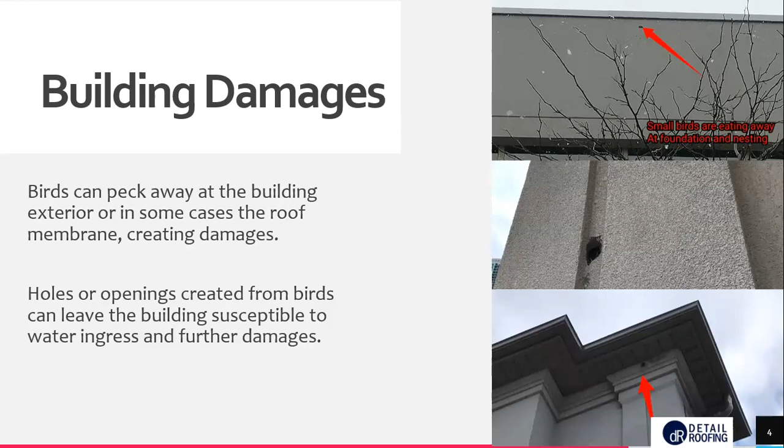Again, if there are any openings, whether it's something that they have created or something that exists already, either from other animals or from wind damages, any sort of opening like that, birds can create nests just about anywhere. So it is something that we see often if there are any openings in the building exterior or throughout the building, and also in areas like gutters or overflow scupper drains. In areas where they are doing it in the gutters or the scupper drains, this can be a big issue as it can potentially block the drainage, causing water to back up and potentially create flooding situations. We also see them sometimes around vents, whether it's on sloped or flat roof surfaces, which can potentially disrupt the ventilation. And depending on where they're built, if it is somewhere that's near a heat source, then it can create a fire hazard.

A huge issue with birds when they are especially congregating in large groups are the droppings that they leave behind. So as you can see here, not only are the excessive droppings unsightly, but there's also a number of other issues, one of which is the fact that these droppings are highly acidic. So if there is an excessive buildup, it does have the possibility of causing deterioration if left over time. So it can cause deterioration to shingles, to metal, to concrete surfaces. So getting that removed as soon as possible and preventing birds from creating excessive droppings like this should be top of mind.

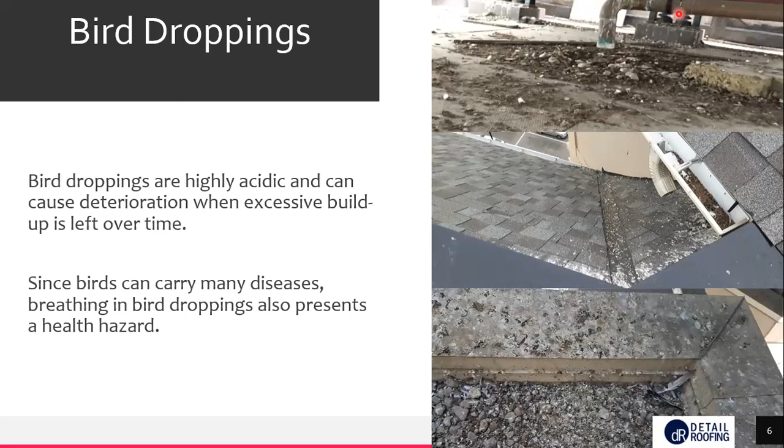In any cases where there are existing bird issues or where there might be any bird issues occurring, we definitely recommend keeping an eye out, whether it's during overall roof inspections or just regular walkthroughs that you're doing of the building, to try and identify any areas where there's damages to the membrane or to the building exterior, like some of the photos we saw that might be caused from birds pecking away.

Any damages that are incurred from bird issues, we recommend getting repaired as soon as possible, just to try and prevent wider spread of damages and potential interior water ingress issues. In cases like, again, some of the photos we just saw where there is excessive buildup on shingles or metal flashings, if it has gotten to the point where deterioration is occurring, then replacing those areas may be recommended. If it isn't as excessive and the deterioration hasn't occurred just yet, it could be a situation where cleaning and removing those surfaces may suffice.

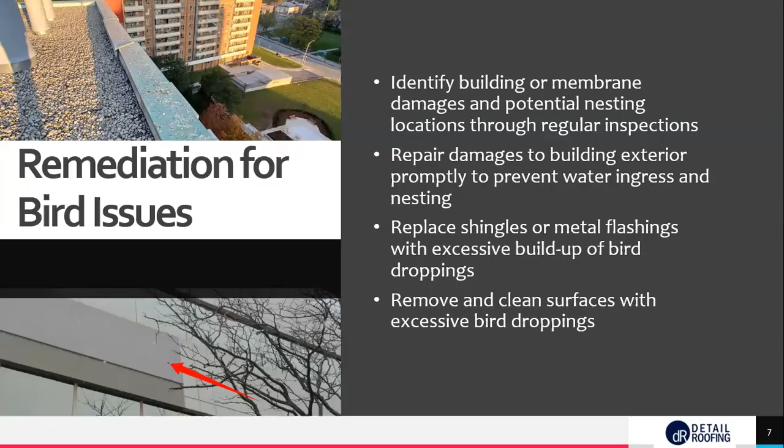However, an important note when it comes to cleaning and removing any bird droppings. Again, because of how hazardous this can be, it's very important that extensive care is taken when dealing with the removal. This is not a situation where you want to just send somebody up with some cleaning supplies to clean and remove these areas. In any of these cases, you want to ensure that the person doing the removal is equipped with full proper PPE, which would include protective suits, gloves, and booties so that there's not any contact with the droppings, as well as respirators.

In this case, you wouldn't want just a standard run-of-the-mill mask. You would want a respirator because, again, breathing this in can be very toxic. Any tools that are being used for the removal, immediately following the removal, they should be bagged immediately so that they can be properly cleaned and sanitized before they are used again in any way.

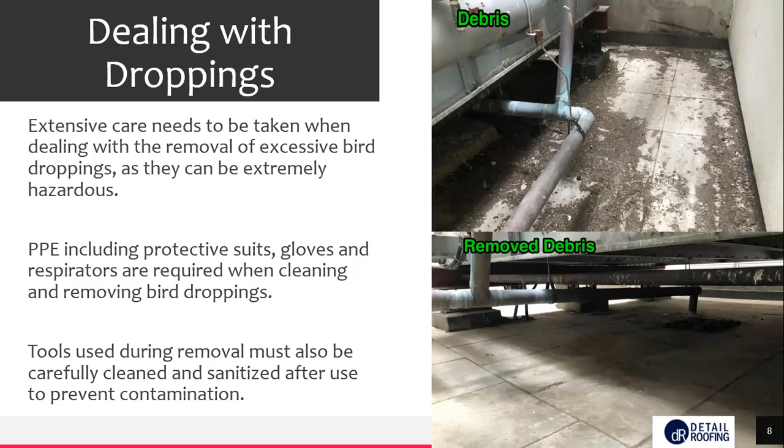So some of the solutions or options when it comes to preventing and deterring bird issues. First and foremost, you want to avoid attracting birds to the building and making them comfortable. One of the things that we hear very often, and I know this can be very difficult to control at times, is when residents are feeding the birds, whether it's from their balconies or just outside the building. If birds know that they have a guaranteed food source, they are going to continue to return to that building. So whatever you can do to prevent anybody from feeding the birds, definitely want to put that to a stop.

Also, birds are always going to find somewhere to perch or to nest. So the idea is you want to make your building less desirable than all of the surrounding buildings so that they're not causing issues at your particular building. When it comes to identifying a solution, it's not a one-size-fits-all situation where a particular deterrent system that worked at one building is going to work at the next. It is going to be dependent on a number of factors, especially because there are so many options out there.

So not only the location of the building, but the specific issue that is occurring, the specific type of birds, and what issue it is that they're creating. We have seen many cases where trial and error may be required to find the system that is going to be the right fit and that's going to prevent birds from causing any issues, especially because birds can be very adaptable. It could be a situation where multiple systems may have to be used in conjunction, or a few different things may need to be tried.

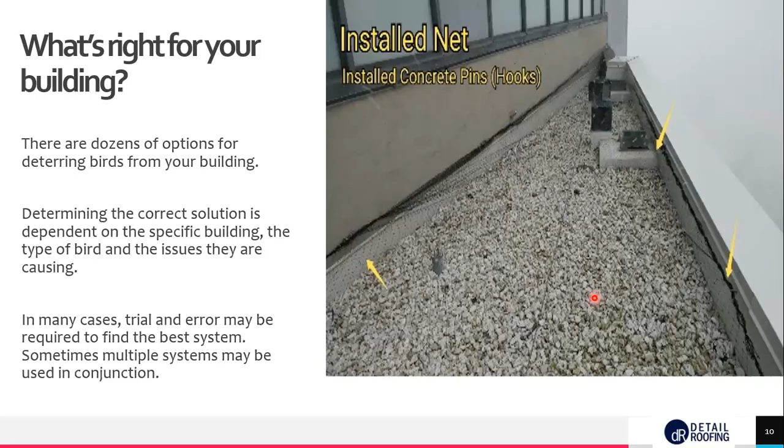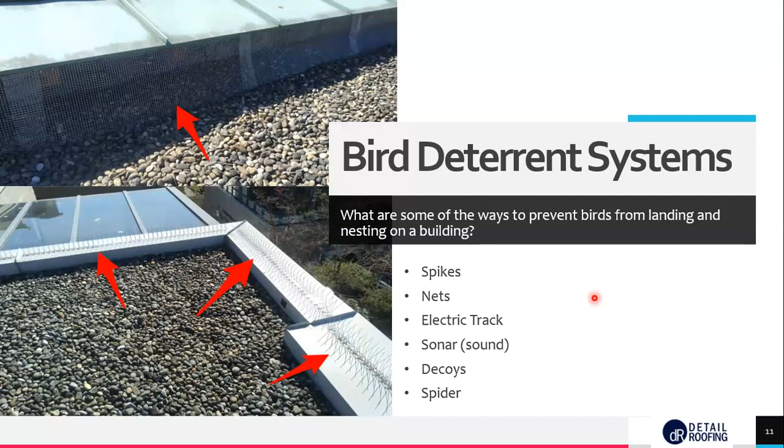So again, there are a wide variety of options out there. The ones that we're going to be looking at today are the ones that we see most often, especially when it comes to condominiums, and those are spikes, nets, electrical tracks, sonar or sound systems, decoys, and spiders. So first up is bird spikes. So these are installed along the edge of the roof surface. And the idea is to prevent the birds from landing and perching in these areas.

As far as the installation goes, it can either be installed with an adhesive or with fasteners. It is important that if you are having spikes installed and fasteners are being used, you want to ensure that those fasteners are being properly sealed and that the sealant being applied is being renewed and maintained over time, because creating that hole will present a potential water ingress issue. Adhesives would also be something that you want to stay on top of and maintain regularly, just to ensure that the system is going to last and stay in place.

So looking at some of the pros and cons of this system, the pros are whether it is with an adhesive or with fasteners, these are very quick and easy to install, relatively low maintenance required over its lifespan. Some of the cons is that it can create an eyesore. So if visual appearance is very important and more important than the issues that the birds are creating, this might not be the right solution. It also might not help to deter any smaller birds that would still be able to land or rest outside of the areas where the spikes have been installed.

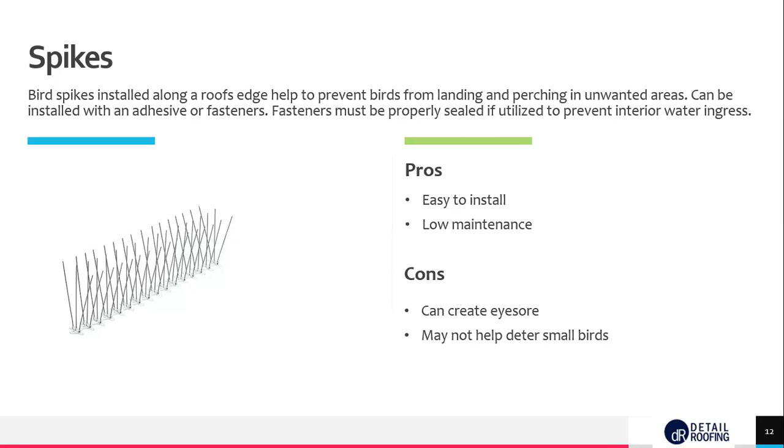Another common one that we see, and a very, very good system overall, is bird netting. So this is especially good in any localized roof areas or any partially enclosed spaces where birds may be landing or entering and creating various issues. The one nice thing about this system is that it's very versatile. It comes in a wide variety of different materials. It can be installed vertically, horizontally.

If it is an area where the netting is being installed that needs to be accessed regularly, there are options for zippers to be installed so that you still can have people going into these areas without having to fully take down the netting every time somebody needs to enter an area. Similarly with the bird spikes, relatively easy to install, no need for any additional trades or extra contractors.

Some of the cons with this, it can be a more expensive option, especially if you are looking at heavier duty netting or situations where there are zippers or other things involved. Again, fasteners would be required for this one. So you are creating penetrations throughout the installation area that are going to need to be regularly inspected and maintained to ensure that any sealant is up to date and not deteriorating and causing potential leak issues.

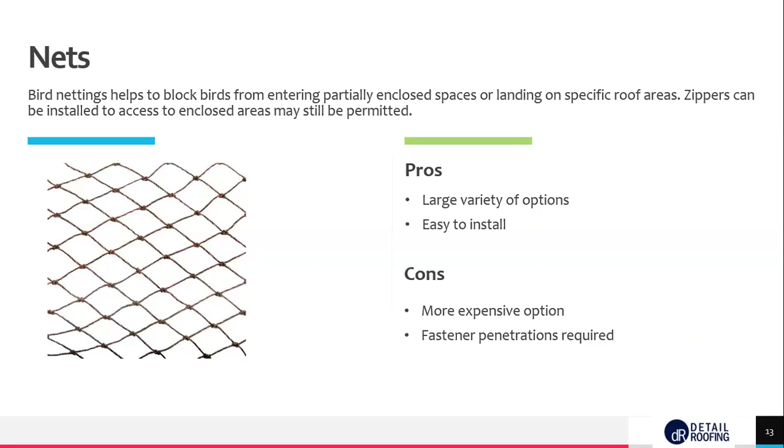Something that is a more sleek option would be an electric track. So similar to the roof spikes, it's something that would be installed along the roof edge. This one does send a small shock when the birds land to try and condition them from landing in that spot. However, unlike the bird spikes, it's not going to create this big visual eyesore in the installation area. So that low profile, definitely a pro with this system.

However, unlike the two systems that we looked at, this is something that requires an electrical connection. So the costs associated with that are greater, and it does require an electrician's involvement to make sure that there is a power source nearby. Regular maintenance is required to ensure that everything is working as intended, and that the electrical component is functioning as intended.

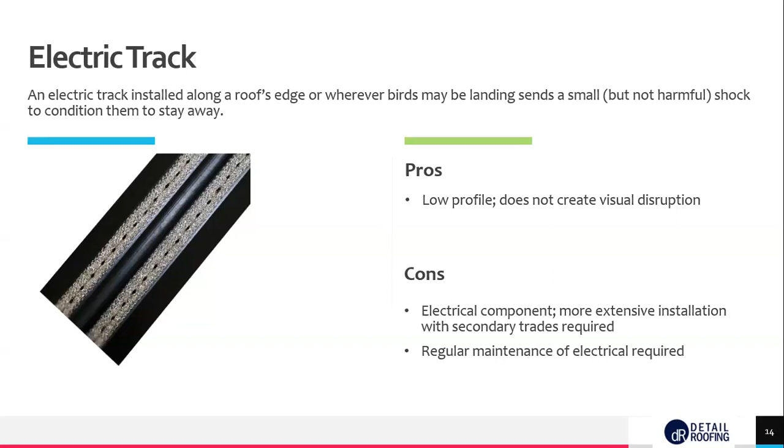The sonar sound system, in our experience, is something that can be very hit or miss. So what these systems do, they emit a sound. You can change the sound. There are many different options, but typically it's going to be a sound that imitates a bird's natural threat. Again, like the electric track, this is something that is sleeker. It's not going to create a visual eyesore. The boxes that they come in are typically weatherproof and made to be outside.

However, it is still something that you would want in a protected area just to ensure that it's not being damaged in any way. There are capabilities to have apps on your phone and control it from your phone or a localized place. It's very easy to adjust, have it set to different times. It can deter a vast number of birds and cover a large area.

However, although it's not creating a visual eyesore, it can, of course, create a nuisance with the sound. We do have a situation in our head office in BC where one of our senior estimators had a sound system at the building where he lives, which was doing an effective job at deterring any birds. However, because of the angle that it was pointed and the time of day when the sounds were going off, it was causing complaints from a neighboring building because of the sounds that it was creating.

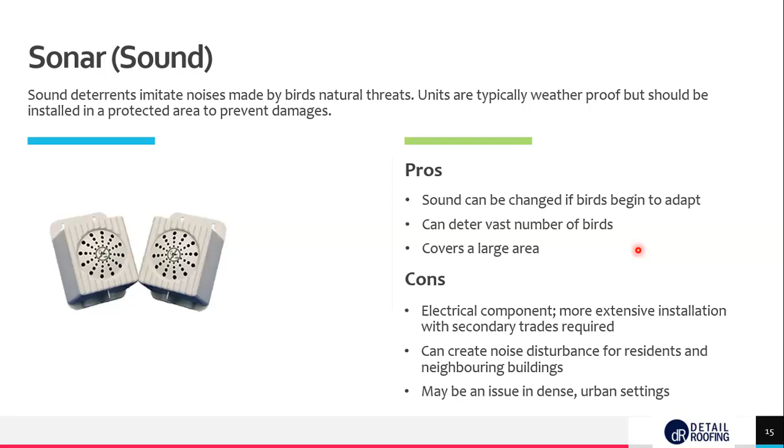So this option we don't see as often, but it would be something that may be useful in smaller roof areas, potentially elevator rooftops, small canopies. So this one is a spider. Similar to the bird spikes, it's going to prevent birds from landing or perching in unwanted areas. However, like a spider, it has many legs stretching out. It moves in the wind, which is great, especially in high wind areas. It's going to have flexibility to move around.

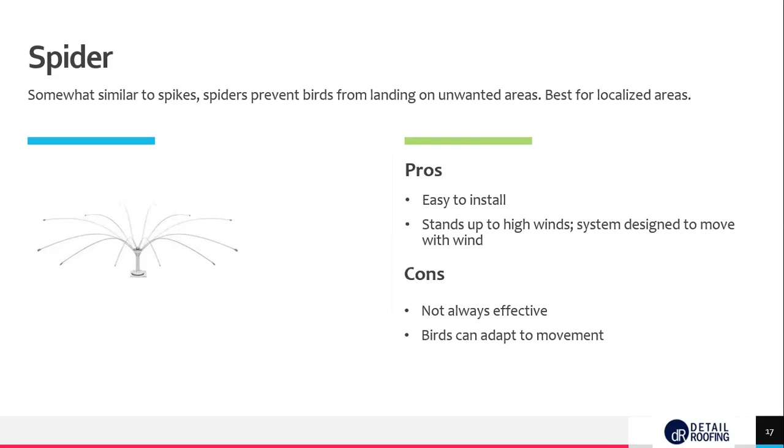So no matter which type of deterrent system is going to be best for the particular birds or particular building, it is important that to extend the life of the deterrent system, you do need to be performing regular inspections and regular maintenance on the system, just to ensure that it's not going to get to a situation where there is breakage occurring or spikes are falling off, whatever the case may be. Depending on the system, there would be instructions on what type of maintenance and inspections would be required. So just making sure that you're staying on top of that will be the most effective way to ensure that the deterrent system is lasting as long as possible.

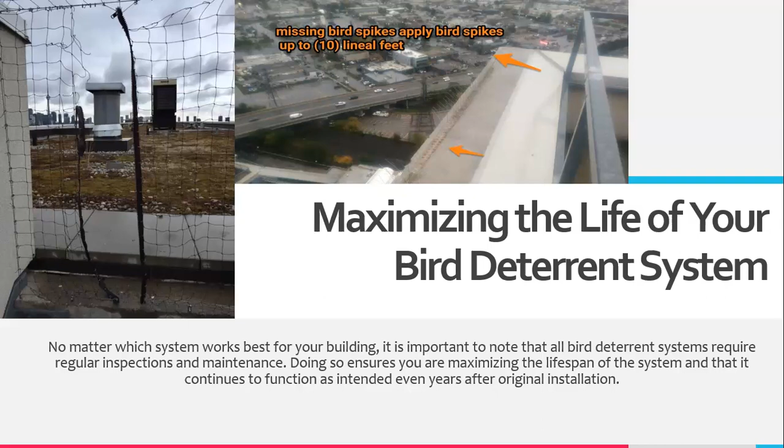And so just before we jump into our Q&A, just a quick overview. So again, unattended bird and pest issues, not only can it be an annoyance, but it also can cause building damages, health and safety risks for a variety of reasons. Completing regular inspections and maintenance and identifying those issues before they become too major can be helpful just to prevent any larger issues. And when it comes to the deterrent systems, again, not a one-size-fits-all solution. Sometimes some trial and error or use of multiple systems may be required to ultimately deter birds from creating issues at buildings.